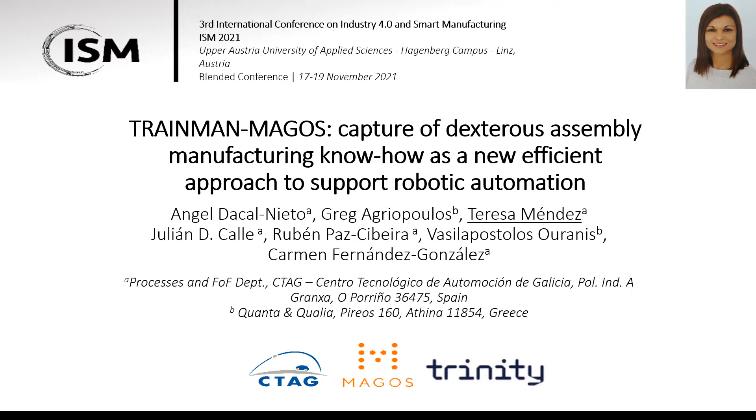TRAINMAN-MAGOS is a finger tracking based solution which uses a sensorized glove to gather hand movements and translates them into a tangible set of instructions and trajectories to fit a combination of a robot and a gripper.

The motivation to develop this solution was due to the complexity of automating high dexterity operations. Despite the fact that automation of manufacturing processes has evolved enormously in the last decades, many processes still remain nowadays being executed manually due to the necessary dexterity to perform them and the complexity to replicate them using an automation or robotic approach. This high dexterity need makes automation a complicated and time-consuming task, but being able to automate such kind of operations would increase productivity and flexibility of the production line.

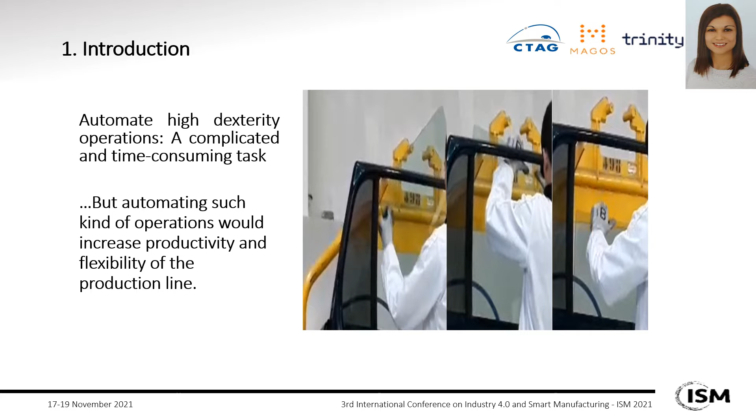Therefore, two partners have developed the TRAINMAN-MAGOS solution, which transforms the gathered hand movements and positions from a skilled operator performing a high dexterity task into a tangible set of instructions to a robot and a gripper.

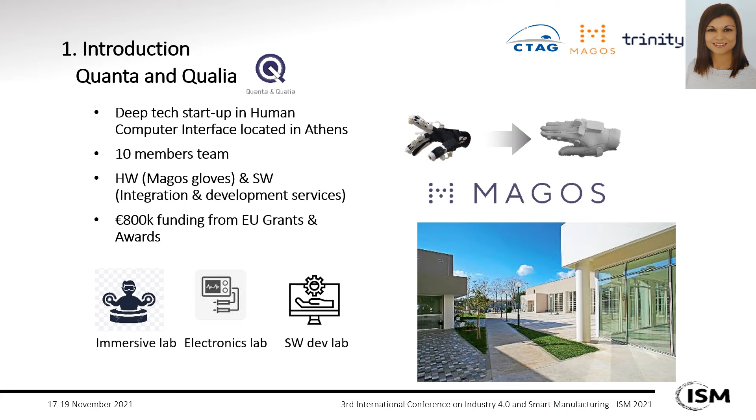The partners who have developed these solutions are Quanta and Qualia and CTAG. Quanta and Qualia is a deep technological startup in human-computer interface located in Athens, Greece. Quanta and Qualia has a multidisciplinary team which has participated in many European projects, being its main product the MAGOS platform, which consists of a sensorized haptic glove which provides finger tracking with up to 22 degrees of freedom, as well as orientation and indoor localization, which makes it useful for many applications.

On the other hand, CTAG is the Automotive Technology Center of Galicia, a research and development technological center located in O Porriño, Galicia, northwest of Spain. CTAG was created in 2002 and it's a private non-profit research and development technological center devoted to support the automotive industry in its research, development and innovation needs. Having more than 800 people working, it has also collaborated in more than 50 European projects.

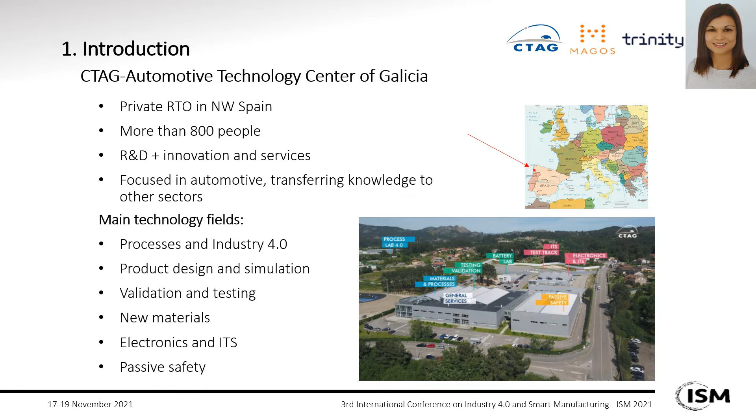As we have previously said, both partners have developed the TRAINMAN-MAGOS solution, which is based on the combination of a sensorized glove, a collaborative robot, a collaborative gripper, and an information system.

The sensorized glove used in this case was the MAGOS glove from Quanta and Qualia. This glove provides finger tracking with up to 22 degrees of freedom, which means that the glove can track up to 22 independent movements of the fingers. This glove also has orientation and indoor localization, which is used to monitor the hands of a skilled operator on one of these complex manufacturing processes.

Then, the collaborative robot, using the collaborative gripper, mirrors the movements recorded by the glove. And finally, the information system translates hand movements into robotic and gripper programs which transform the gathered hand movements and positions into a tangible set of instructions to the robot and gripper.

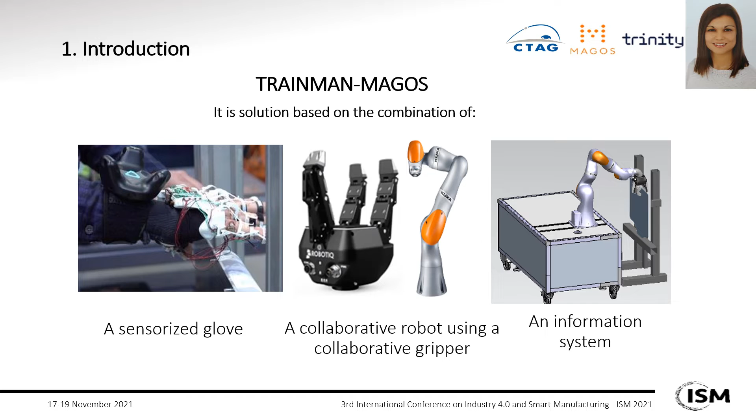TRAINMAN-MAGOS can hence dramatically decrease the development time of robotic implementations in those extreme dexterity cases and the implementation time for deploying the robotic operation. On the other hand, it is also interesting as a new tool to register and exploit this kind of skill knowledge usually confined and inaccessible.

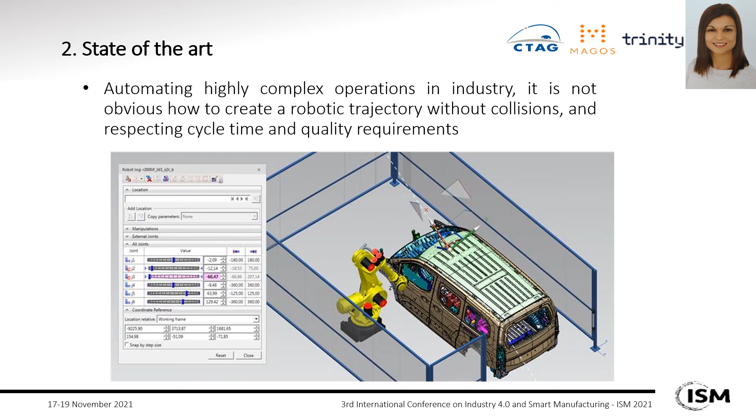Talking about the state of the art, when replicating a task traditionally performed using human hands in complex operations, it's not obvious how to create a robotic trajectory without collisions, respecting cycle time, and respecting quality requirements. In addition, in these cases, each point and angle must be carefully selected and programmed so that the operation to be performed could be carried out correctly without harming any person or any element where the task is executed.

Additionally, if the robotic system needs a robotic gripper, the difficulty to develop the program increases because a robotic gripper is a high-technology device that imitates the behavior of a human hand with more or less similarity. And, as you can imagine, a gripper's complexity is directly related to its cost. In this case, the simplest and least expensive option in the market was selected, which was the Robotiq gripper, as a means to make the solution accessible to every potential user.

On the other hand, it is very difficult to express, in a detailed manner, neural control-related expert behavior in words or as a set of instructions. So one alternative is the use of a gesture monitoring system that can automatically gather this expert knowledge. In this category, we find sensorized gloves, which include different types of sensors to collect this usually inaccessible data. One of the best examples is the MAGOS glove, which was the one used in this solution and whose patent is still pending.

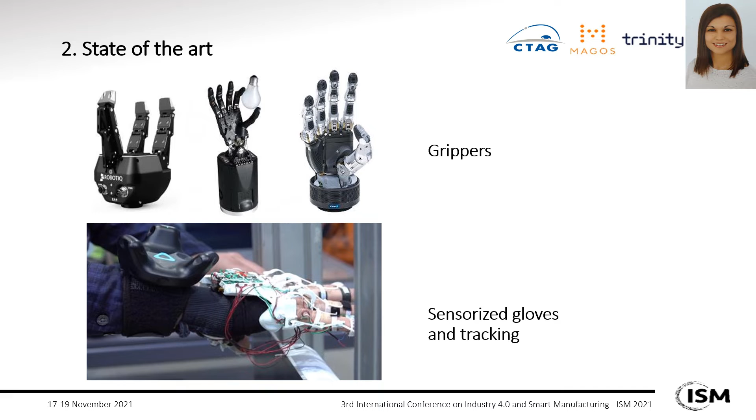Nevertheless, it can collect up to 22 degrees of freedom, finger tracking, hand orientation, indoor localization, and haptic feedback, which means the glove gives the sensation of touching something real when in fact it is not. What makes Magos glove unique is its level of accuracy, offering 250 times more accuracy than its competitors, as well as the highest degrees of freedom in the market.

Continuing with information capture, when a system is used to collect movements from an expert, this data can be used almost directly to have a first draft trajectory and gripping steps. This draft trajectory must be refined afterwards by an expert robotic technician, either using an offline or online approach. In this case, the system used was the Tecnomatix process simulator. However, starting from a draft trajectory usually requires less development time than creating the trajectory from scratch. This is the basic idea of this paper.

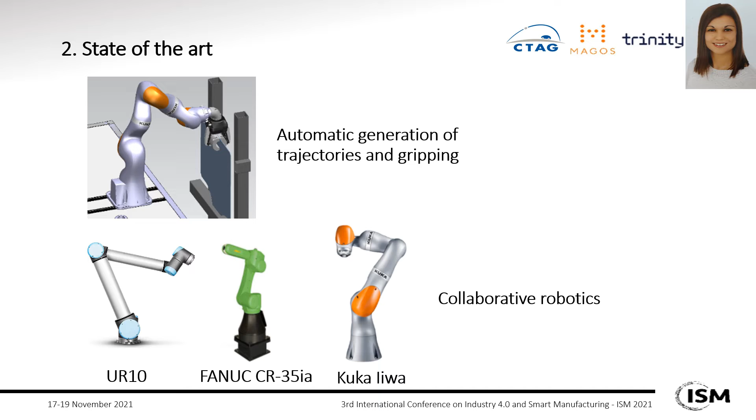Last but not least, a very relevant component of the system is the robot. There are many collaborative robots such as the UR10 or the Fanuc CR35IA. However, some of them claim to be sensitive, like the Kuka Iiwa, which has been the robot used in TRAINMAN-MAGOS solution. This means the robot provides extra sensory capabilities which can detect if it is hitting or touching something. This additional feature can be of high value when manipulating parts in mounting operations.

Concerning project development, the architecture diagram of TRAINMAN-MAGOS solution is composed of three main stages. The first one is training. The sensorized glove, currently using finger tracking and indoor localization system, produces an XML file with the readings of the sensors. The second stage is pre-processing.

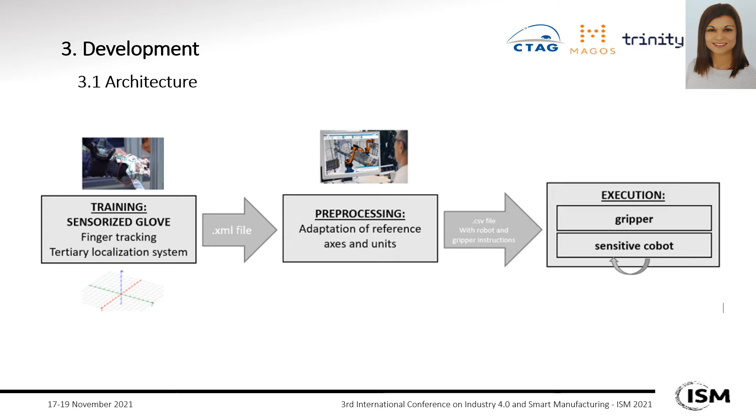An offline simulation software consumes this XML file as input, adapts reference axes and units, and produces as output a CSV file that can be used directly as a set of trajectories and gripper instructions. The third stage is execution. A set of gripper and sensitive collaborative robot moves according to the CSV file.

Thus, the solution workflow starts by the performance of the dexterous operation by an operator wearing the Magos glove. Frequency of capture of the diverse sensors in the glove can be configured and was established at 10 Hz as a sufficient rate for providing fine trajectories.

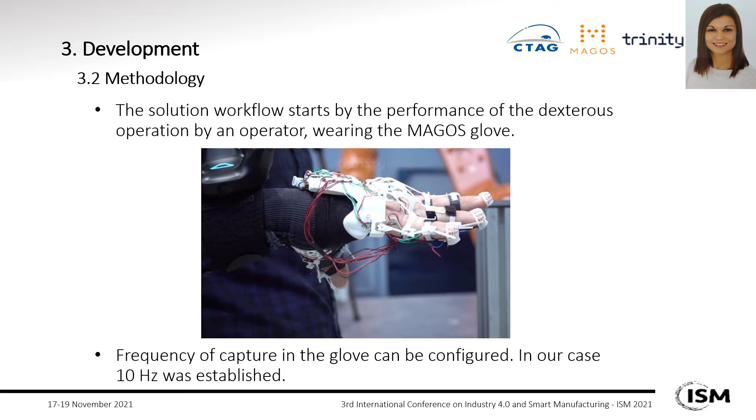Since the gripper to be used has only 3 fingers, only data coming from 3 fingers of the Magos glove is considered. Thus, the data gathering from the glove provides data in X, Y, and Z axes and roll, pitch, and yaw angles from these 3 fingers' first joint angles. Due to the chosen gripper, pressure is applied at maximum in every case.

While the glove registers information from the fingers, the tracker registers how the hand moves through space by using a tracker device attached to the wrist and at least 2 base stations which define a workplace. This means that without the tracker, we would just have a stationary hand moving its fingers, while the tracker provides additional degrees of freedom to allow a proper register of the operator actions through the workplace.

The offline simulation software takes the registered values from glove and tracker and concatenates these into a preliminary trajectory. Additionally, it adapts orientation and scales the read values into valid gripper instructions. The trajectory and gripper steps are manually refined in this virtual model by the robotic technician so that it can be finally implemented in the real world afterwards.

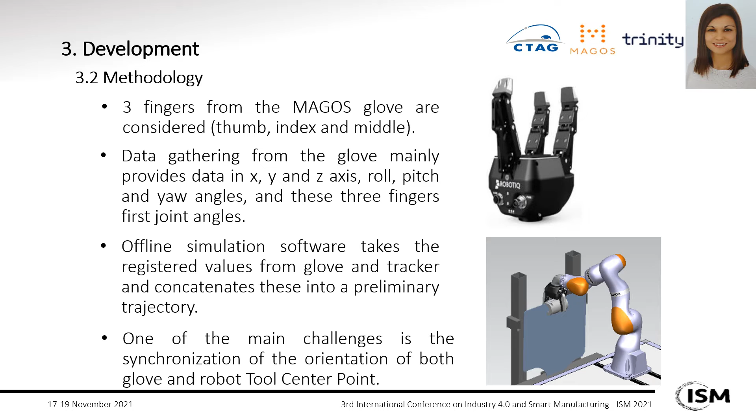One of the main challenges is the synchronization of the orientation of both glove and robot Tool Center Point. This means that both systems need to have a set of common reference points. In this case, it has been done by assigning 3 points in space using robotic pin calibration tools.

Concerning the validation of the solution, a pre-industrial validation phase was developed, replicating a real industry use case as a sample of its potential. An assembly of door glass in the automotive industry was chosen, mainly due to the fact that the product is fragile and it is an aspect element that cannot be damaged. Additionally, the assembly accuracy required is high and complex movements for placement and fixation are required.

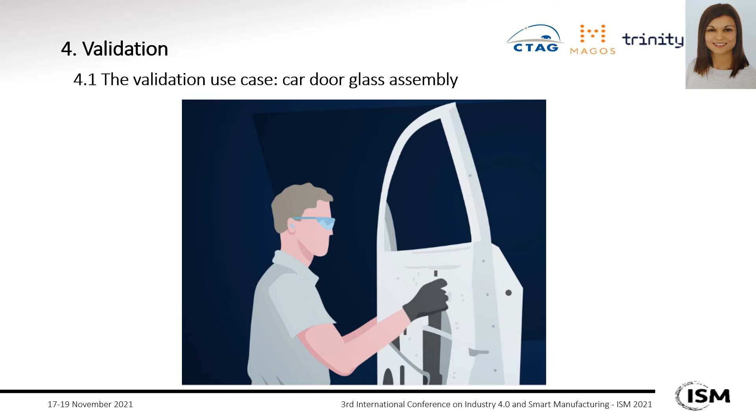This use case was replicated in CTAG facilities, and a set of car door, glass, and mechanical support to handle the door was prepared to support the tests. In order to prevent damaging the glass door, a glass-alike aluminum part was designed and manufactured to mirror the shape and weight of the original glass. Additionally, the selected gripper was not fully prepared to grasp the glass-alike part with safety, thus a support was created allowing stable part gripping.

Therefore, the validation phase consisted of an iterative execution, so the solution was incrementally refined until obtaining a satisfactory result. We worked with more than 40 executions to reach a good final result. Once a good trajectory and gripping were obtained, a series of cycles were executed to check that this tuned trajectory was satisfactory in terms of long-term quality.

20 cycles of tests were launched, and as a result, the glass-like part was successfully placed in 100% of the executions. Regarding cycle time, the tuned trajectory is equivalent or faster than the one performed by the operator during the training, so the achieved result can be complementary to the human task. Therefore, this validation proves that the TRAINMAN-MAGOS solution is able to solve the demanding manipulation restrictions of a real manufacturing problem with a high resultant quality.

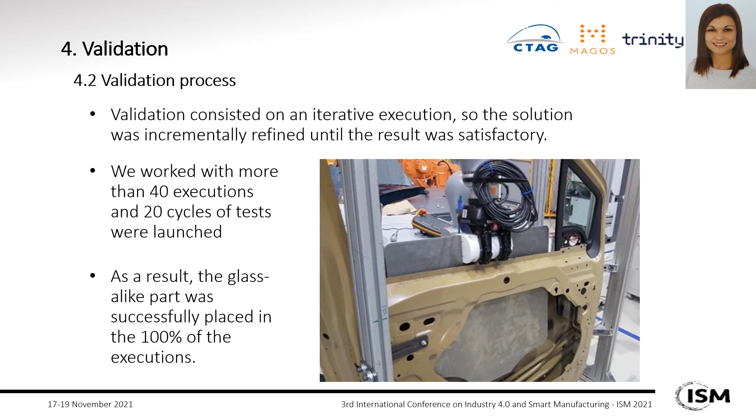About TRAINMAN-MAGOS advantages, the system has three main effects in the automation process. The first main effect is that the development time of robotic programs is decreased. The average time necessary to build a robot trajectory from scratch is radically reduced, providing a rough trajectory that can be further refined by a robotic technician. We have measured that this approach saves up to 70% of the time of the usual procedure.

The other effect is that commissioning time of the robotics application is also decreased. The time spent by the robotic technician making the final adjustment is reduced up to 20%. This is due to the high quality of the draft trajectory provided by the hand movements recording. And the third effect is that the commissioning expenses are decreased.

It's not rare to damage some of the involved products during the final adjustment of the trajectories. In the present use case, since the trajectories are of high quality when arriving to the manufacturing line, the probability of damaging parts is reduced up to 20%. These improvement rates have been empirically calculated, taking into account staff experience in the field.

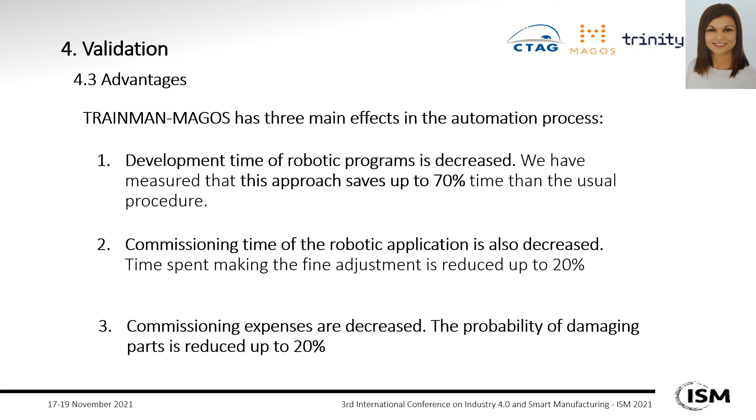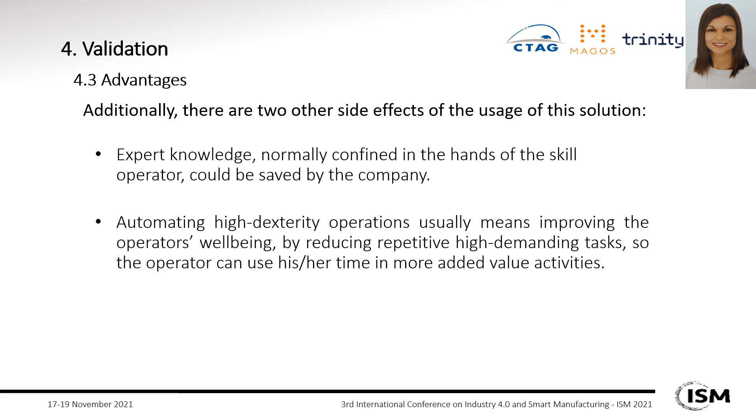Additionally, there are two other side effects of the usage of this solution. One effect is that expert knowledge, which is normally confined in the hands of the skilled operator, is saved by the company, being an important asset of the organization that should be managed and controlled. And the other effect is that from the ergonomics point of view, automating high dexterity operations usually means improving the operator's well-being by reducing repetitive, highly demanding tasks so the operator can use his or her time in more added value activities.

So, we can conclude that TRAINMAN-MAGOS is a new solution to support robotic automation projects, based on the usage of a sensorized glove as a means to extract the dexterous know-how that is further translated into specific robotic instructions to be executed by a collaborative robot and a gripper. This way, manufacturing operations highly dependent on human manipulations could be totally or partially automated, being validated with the placement of the glass on a car door.

TRAINMAN-MAGOS' main advantage is the robotic technician time saving, while creating and while installing the robotic solution in factory. It allows obtaining a draft robotic trajectory from the operator's hands by using specific tracking devices, instead of creating this trajectory from scratch. This makes it possible to save this important know-how and improve the workplace ergonomically. We strongly believe that this solution can unblock and boost the automation of high dexterity processes in many manufacturing sectors, in which the classical robotic programming approaches are still the main option nowadays.

The main future challenges to improve the solution are making it able to support as many robot and gripper brands as possible, including other sensors in the glove and the training phase, and validating the possibility of using two sets of robot and gripper at the same time so that operations using both hands can be successfully replicated.

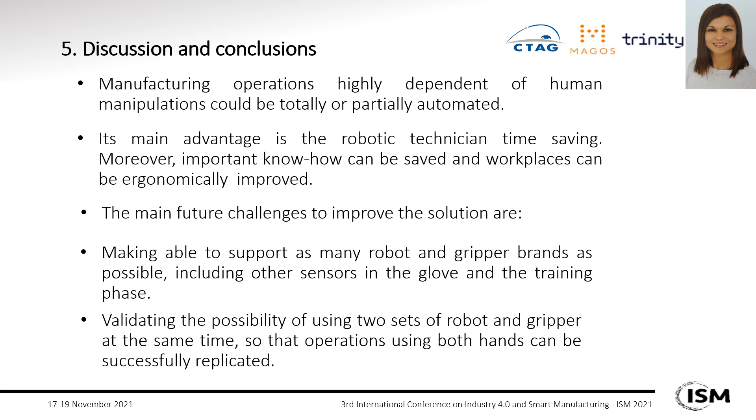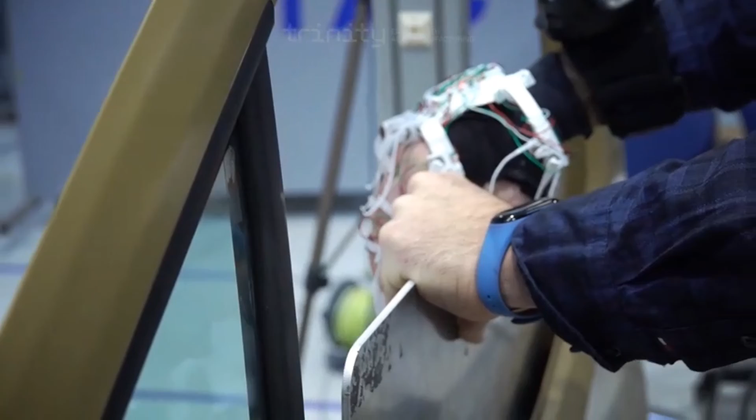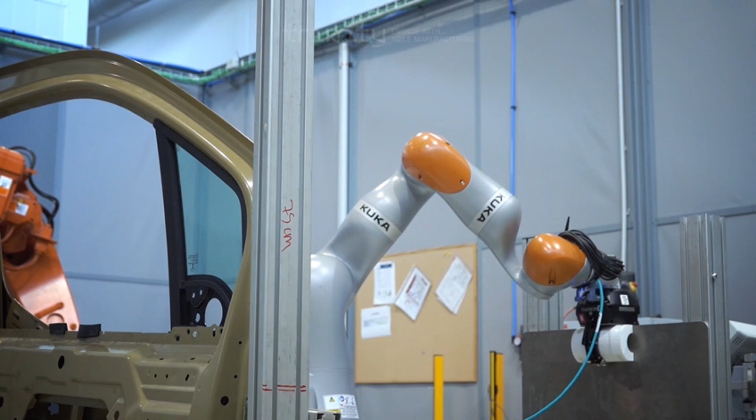Finally, in the following video, you will see how the TRAINMAN-MAGOS solution works in order to support the automation of the glass assembly in a car door. As you can see, firstly, an operator using the MAGOS glove picks the glass-like part. Then, the operator performs the assembly of this part in the door. And, through the methodology explained before, the collaborative robot and gripper replicate this movement, thus saving the development programming time as we have previously explained.